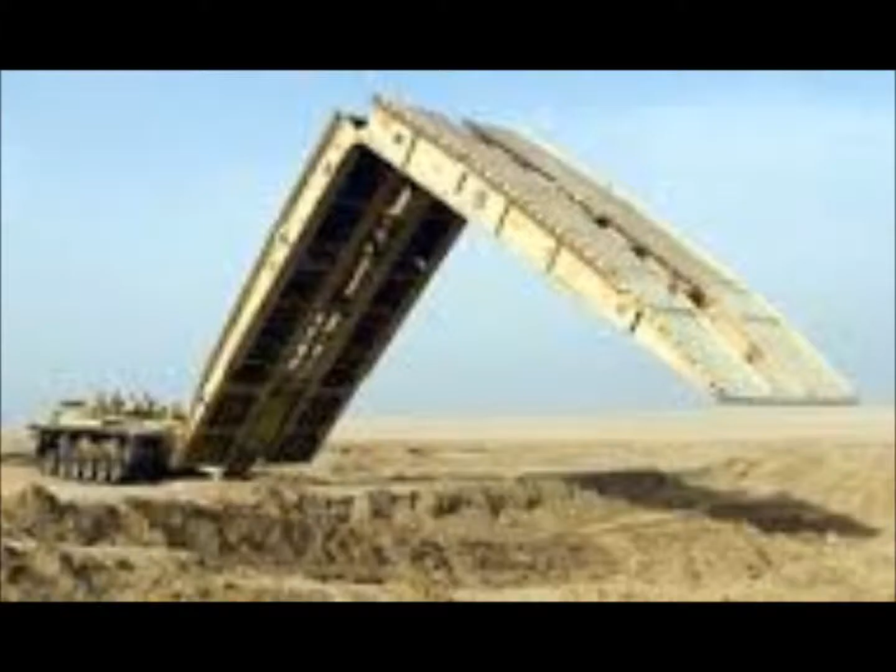Design of an electromagnet scissor truss deployment bridge. First designed during World War II, deployable bridges were invented to cross areas with inadequate infrastructure. Deployable bridges today are used in a variety of military and relief operations. Deployable bridges are lightweight bridges that are easily set up and taken down.

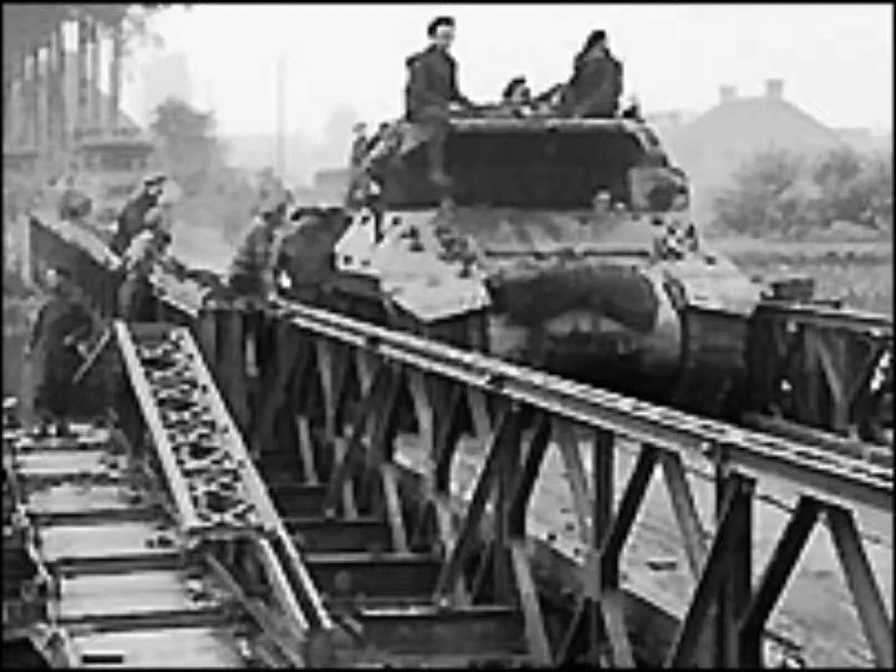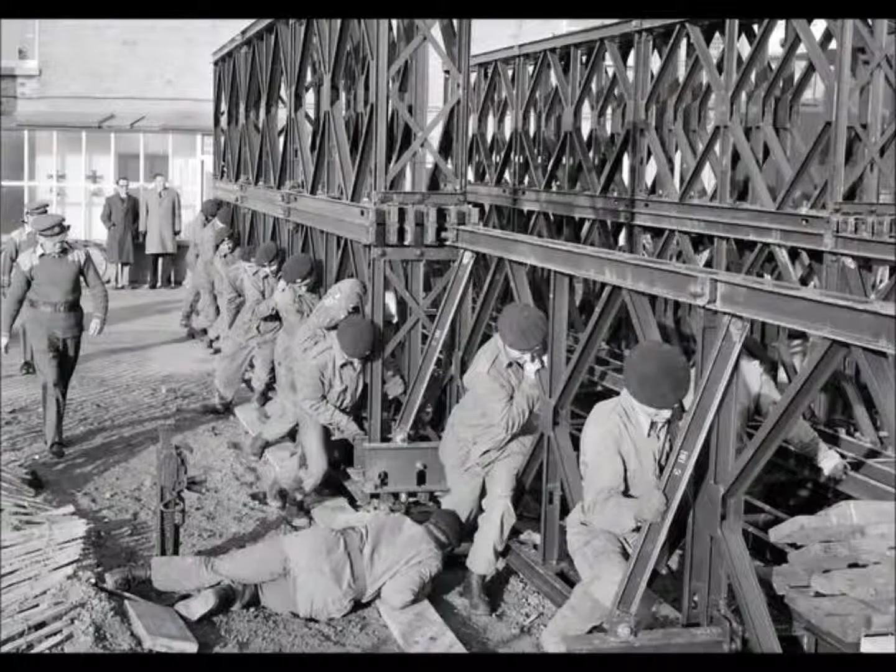The bridges are mostly used after natural disasters where transportation of supplies is urgently needed. But after such disasters, roads and bridges are closed or flooded, making it very hard to transport vehicles across. Different structural designs should be used to cross different spans because there are different stress dispersions.

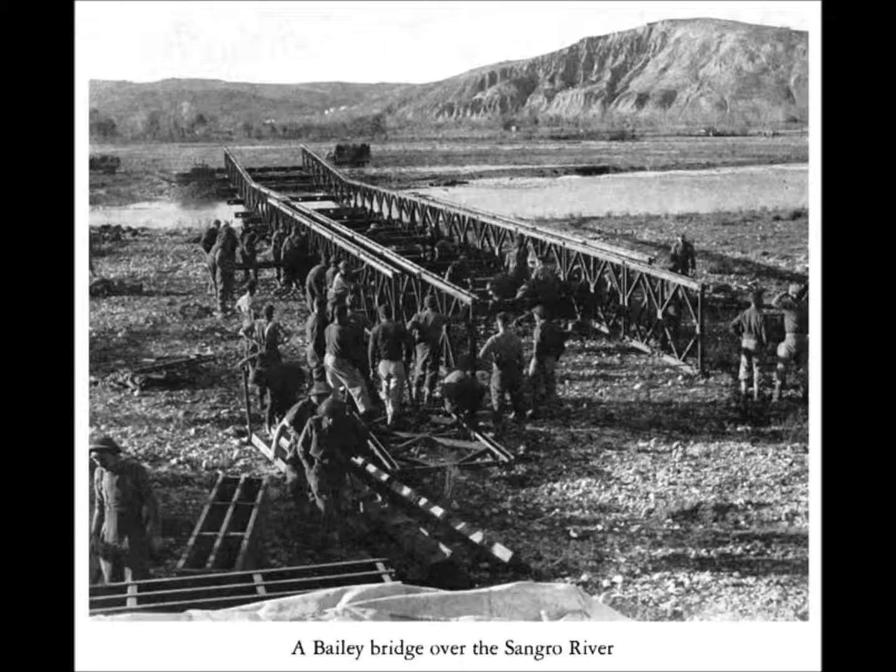There are 5 main points that engineers designing the bridge have to remember in order to make a good deployable bridge. First, since the bridge has to be deployable without advanced knowledge of the span of the ditch or stream, it has to be able to be multiple lengths. Second, the construction material has to be readily available. Third, the bridge design has to be basic and repeatable, so that only that one piece has to be manufactured

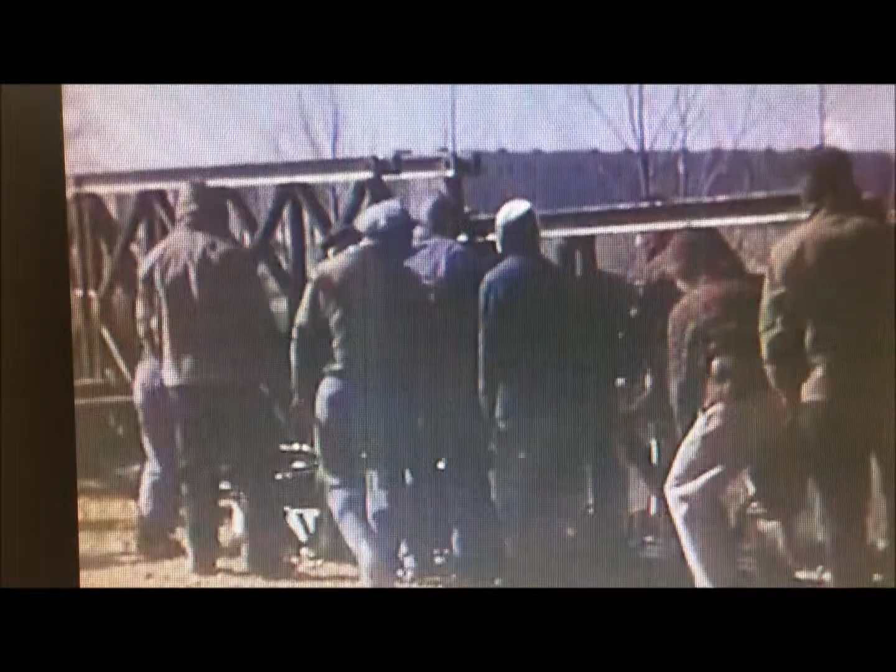over and over again. Fourth, it has to be deployable, which means that it has to be lightweight for a few people to be able to carry it. And the fifth guideline is that the bridge has to be easily put up and taken down, so a simple design is needed.

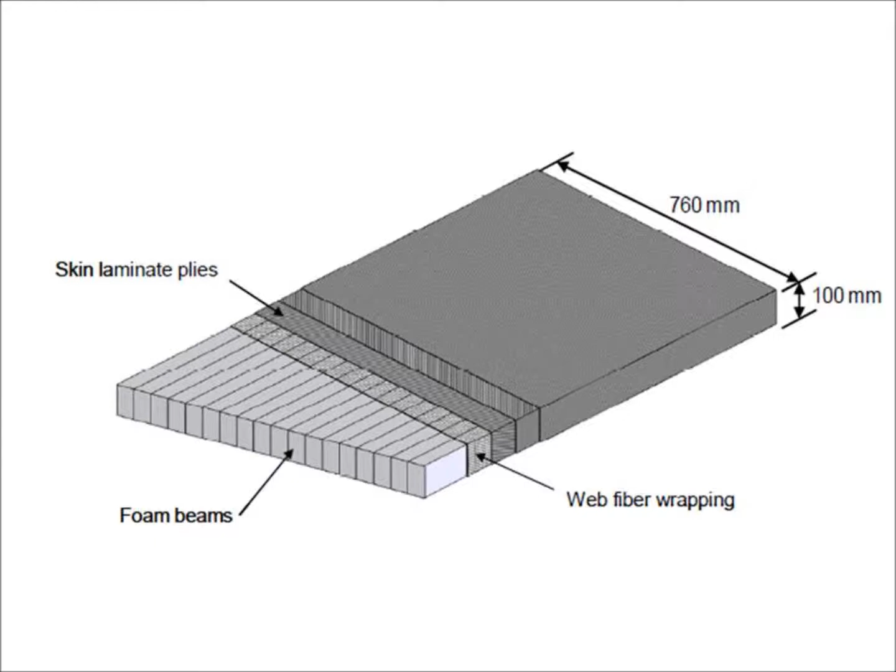Kosmatka used a classic beam bridge design, laying down 2 750-pound planks made of a foam core with a carbon epoxy skin next to each other. 2 planks had to be moved in Kosmatka's experiment.

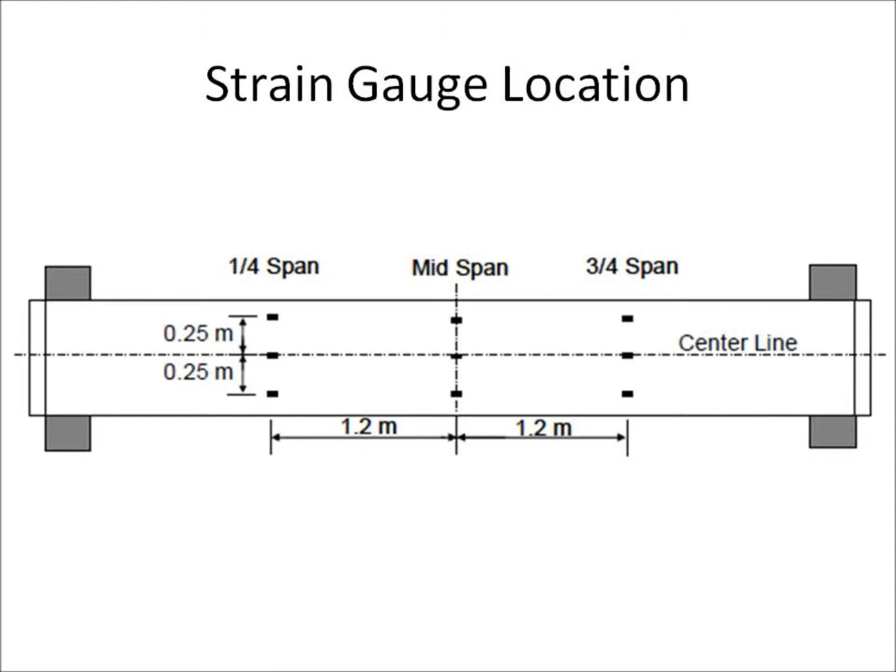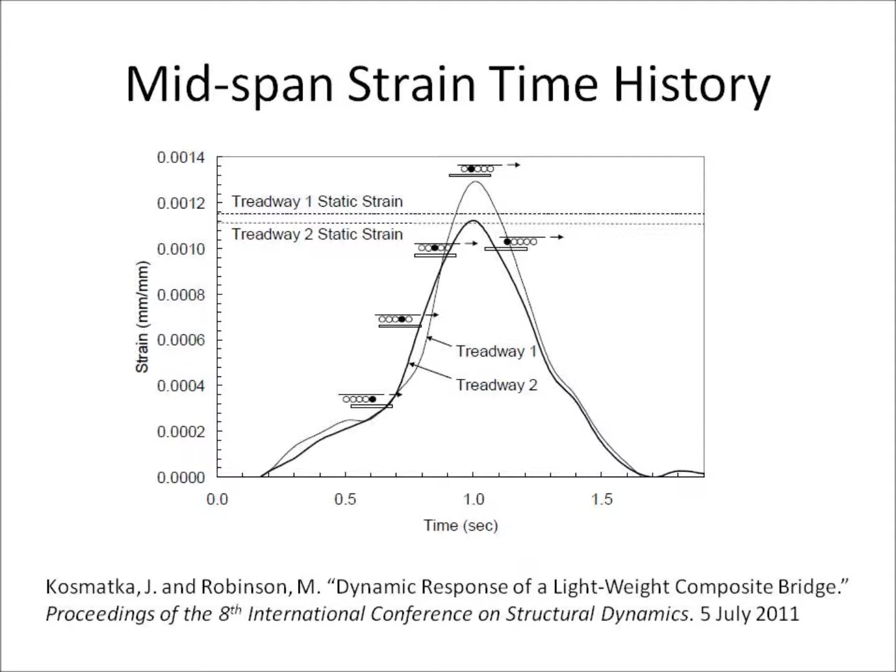Agusril and Abdullah both used the same design for their deployable bridges. It was a beam bridge that from the side was a solid trapezoid. It started at the ground, ramped up, was flat, then ramped down again. Where the slope angles changed, there were hinges so that the bridge could be folded into thirds. This allowed it to be transported in the back of a truck. The bridge was also very light.

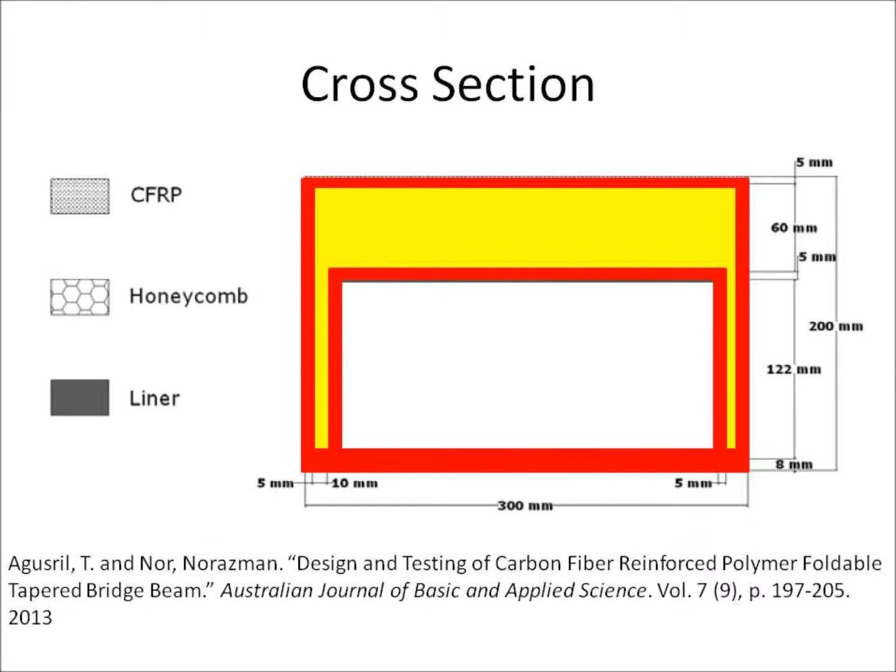This is what it looked like from the cross-section. The outside, highlighted in red, was made of carbon fiber to support the top, highlighted in yellow, which was aluminum. This beam bridge system works for short spans only because if there was too much weight added, the vertical deflection becomes too great and causes the bridge to fail.

As you can see in the graph, where the y-axis, which is the independent variable in this case, is the load, and the x-axis is the displacement in millimeters, already the 6-meter bridge Agusril designed was not even able to withstand more than 11.3 kilonewtons, which is equivalent to 1.15 tons. A longer span would not be viable. A deployable bridge should be able to hold a minimum of 30 tons.

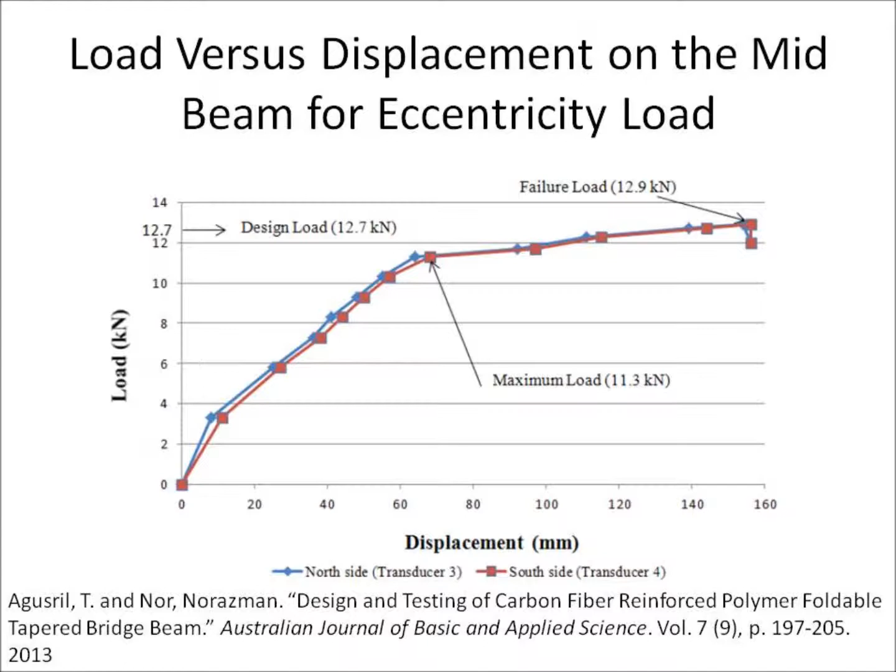The yield limit for this bridge is 11.3 kilonewtons, because after that point the displacement changes drastically for every small increment of weight added. The article's other graph, deflection of the middle beam as the load is moved across the bridge, shows that the deflection in the center of the bridge is almost the height of the bridge itself. This is why beam bridges are not a good choice for longer spans, because they do not have reinforcements to keep them from bending under the load.

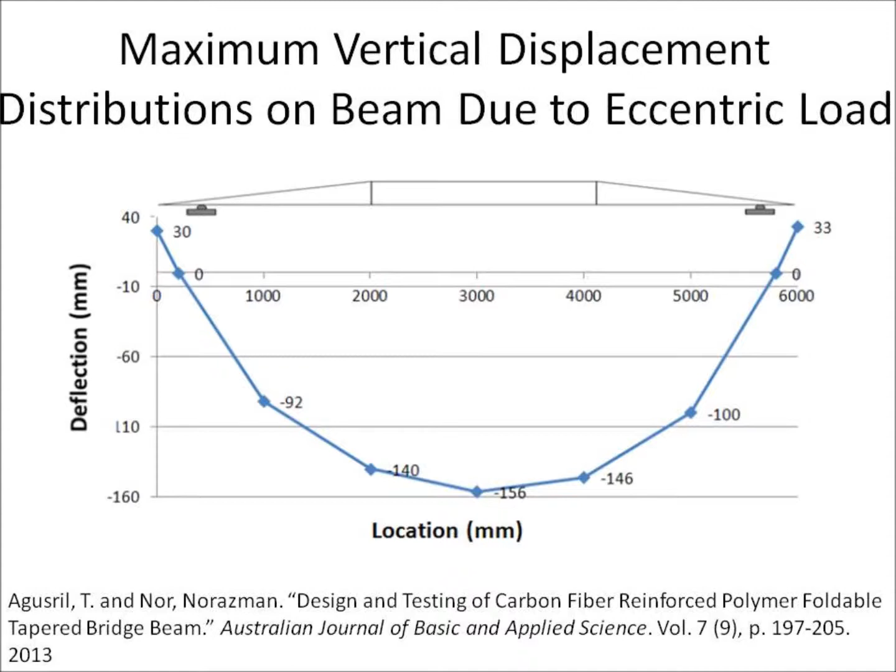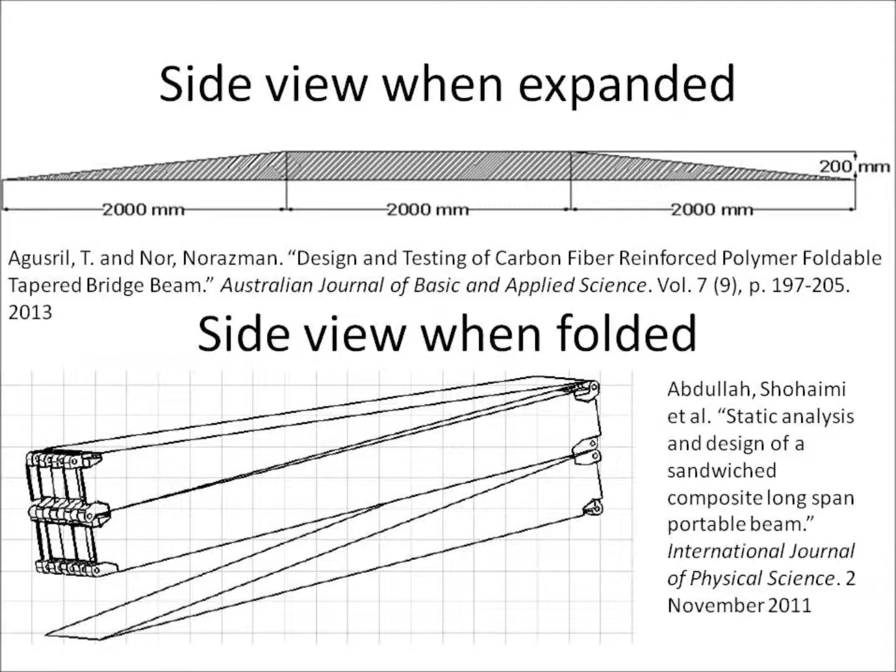All 3 journal articles used bridges that were short compared to the maximum possible span needed. Beam bridges do not work well for longer spans. Usually taking the form of a trapezoid, the truss bridge is commonly known for its triangles and/or X's. It has a top and bottom span which are connected by perpendicular king posts. The king posts are then connected by diagonals, truss members, which give it its distinct look and make it sturdier to withstand heavy loads.

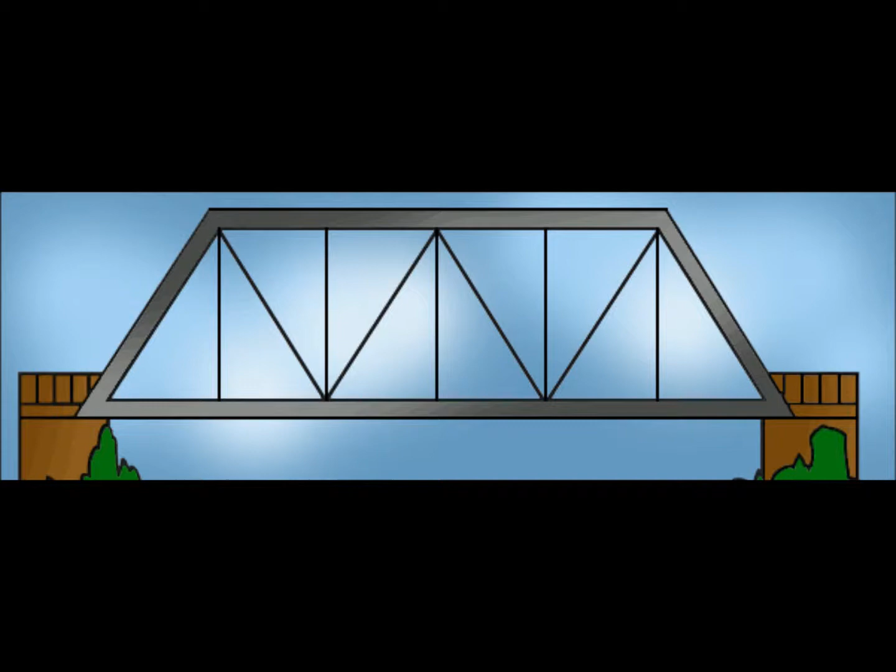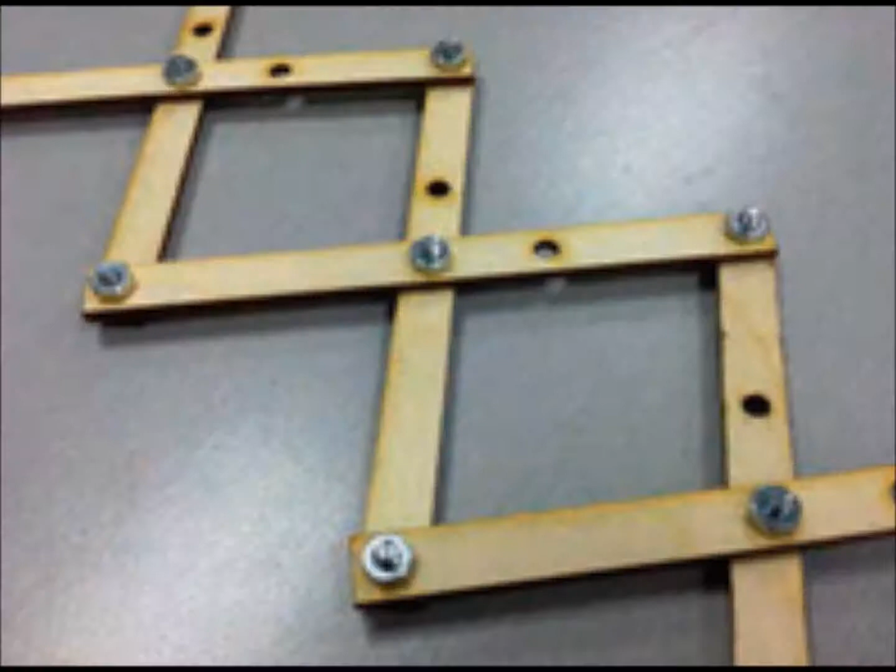Another design, as suggested by Juan, is a truss bridge with a scissor deployment. The design of Juan's bridge is very simple and is seen in other devices that use a pivot point. His concept was a scissor extension. The centers of the X's in the truss frame are on pivot points and shift to lay on top of one another when pressure is added from both ends. This causes each X to fold into one line, and the entire bridge is easily movable.

Juan's bridge was strictly pedestrian and therefore did not have to carry as much weight and be as stiff as a vehicular bridge would have to be. This bridge also met all the deployable bridge criteria.

Because it was able to scissor out and expand to any length, the scissor mechanism could be repeated multiple times, making it easy to manufacture because it is two truss members with a pivot point. It was made of hollow steel, which isn't that lightweight, but is available and is lighter than regular steel.

The scissoring out is what makes it so easily deployable, and was the entire point of designing a bridge that way. Juan's bridge is deployed by having two scissor truss infrastructures. One infrastructure is used to be the top of a pulley to allow the actual bridge to slowly be dropped across the void.

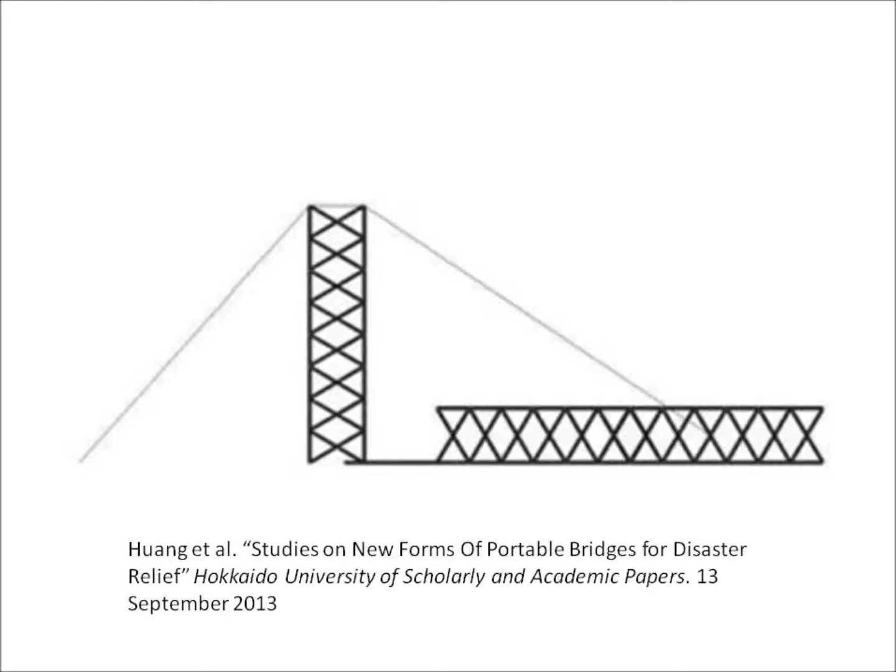The purpose of this experiment is to come up with a new idea for a deployable bridge which is lightweight and durable.

Before the proposed design can be explained, a general overview of where stress is on a truss bridge must be explained. The king posts are under compression and the truss members, the X's, are under tension. The top span is being compressed because of the vertical deflection as the load moves across, and the bottom span is under tension.

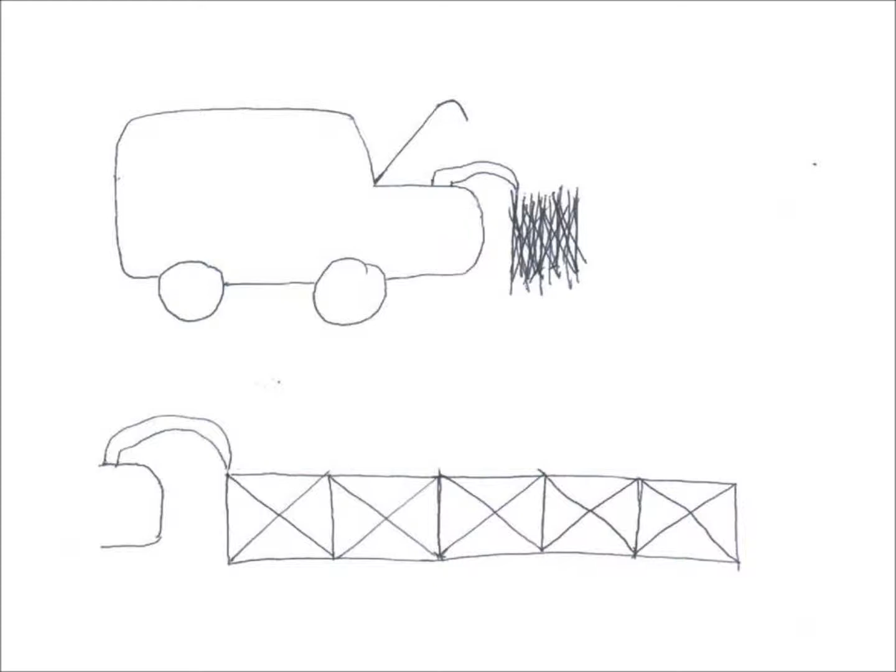The design proposed in this video is very unique. It will use electromagnets powered by the truck to expand the scissor truss bridge. The magnetic field is created when electrons spiral. By having one piece in the bridge spiraling one way and the opposite side spiraling the other way, two different magnetic poles are created, causing them to be attracted to one another.

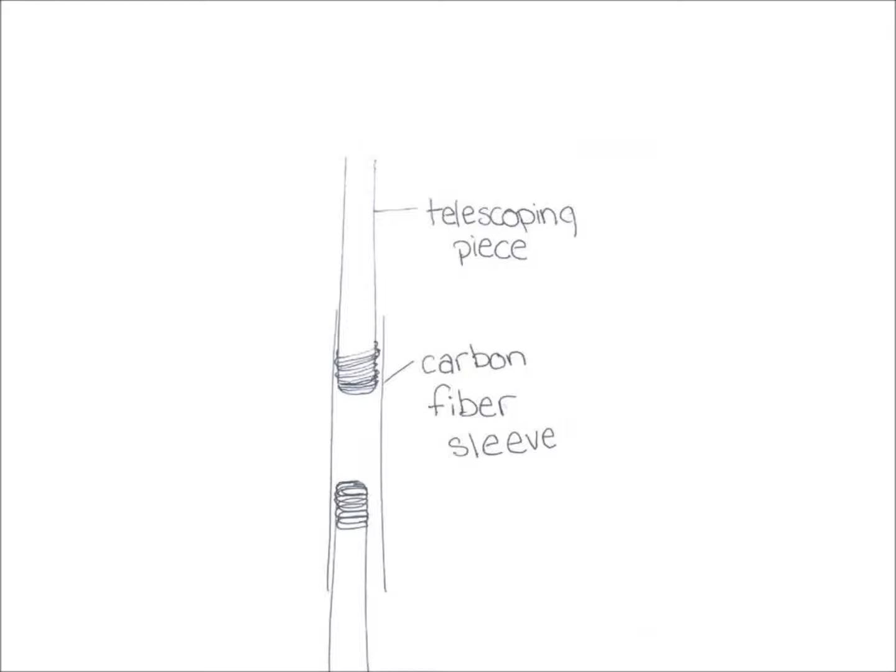The king post will be a sleeve made of carbon fiber so that it is lightweight but still durable. Two steel cylinders are able to telescope inside the sleeve. Those telescoping steel pieces would have wires coiled around them to create the electromagnet. The electromagnet would get its electricity from the car the same way a car is jump-started.

When the magnet is turned on, the steel pieces are attracted to one another, causing them to come together inside the sleeve and shorten the king post, causing the truss pieces to scissor out. The only possible problem is that when the current is quickly released to the coils, the electromagnets may snap together too strongly and may rip the bridge by not giving it enough time to pivot.

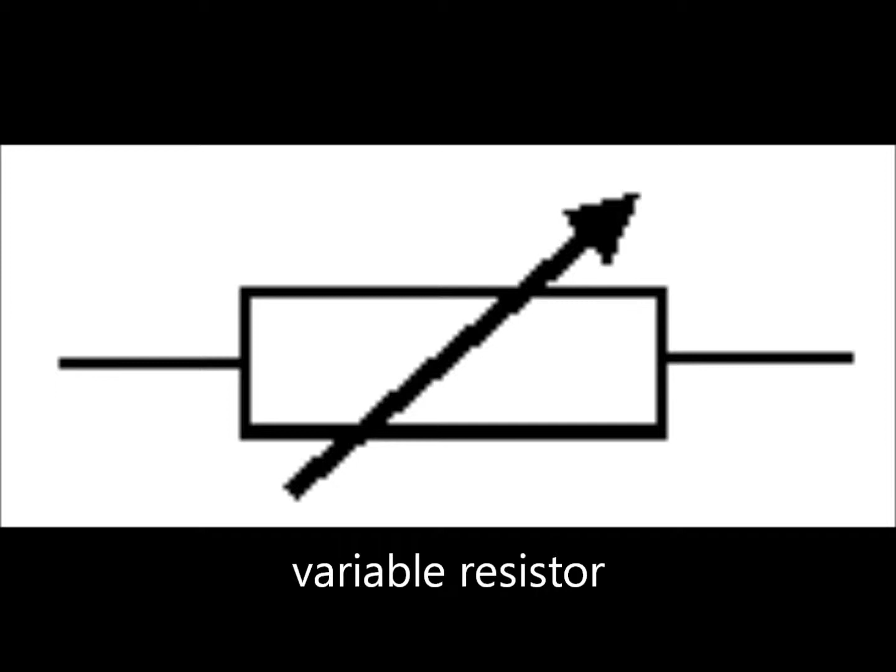Therefore, like a dimmer switch in your house, a resistor will be in place to restrict the current. Once the bridge is deployed, the electromagnets can be disconnected because the king post will be under compression anyway and would not need that reinforcement.

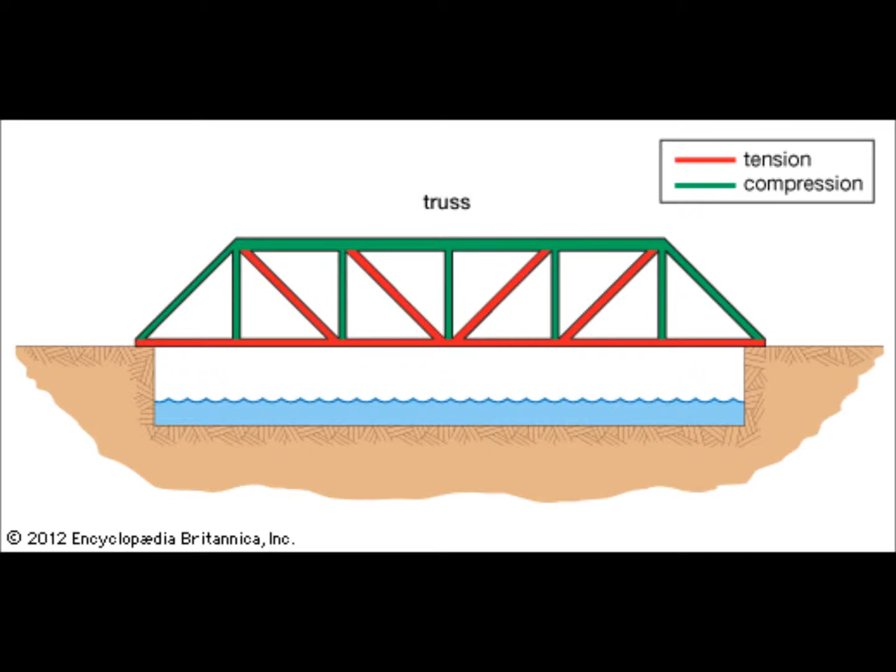However, hypothetically, the best thing to use would be carbon fiber because it would create the lightest but most durable bridge. However, carbon fiber is very expensive, so instead I'm going to use PVC pipes, which are plastic pipes, which are also lighter than metals, and are also very durable.

After the bridge is designed and built, two tests will be done. One, timing the speed it takes to deploy, and a second, measuring the strain. The test that measures the time will have two variables: one where there is no variable resistor, and the second is using the variable resistor to deploy the bridge. Then a one-way ANOVA post-hoc Scheffé test with p-value less than 0.05 will be done, and it will be graphed with its averages plus or minus standard deviation.

Strain gauges will be used to measure the stress exhibited when the electromagnets are on, while they're on but have little power, and when they're off. Each of these groups will also have different weight loads: 50 kilograms, 100 kilograms, and 200 kilograms.

50 kilograms represents a person walking across the bridge because an average person is about 50 kilograms. 100 kilograms would be a person with a backpack, and 200 kilograms is equivalent to either 2 people with backpacks or 4 people. Then, after the measurements are taken, a one-way ANOVA post-hoc Scheffé test with a p-value less than 0.05 will be done, and the averages will be graphed plus or minus standard deviation.

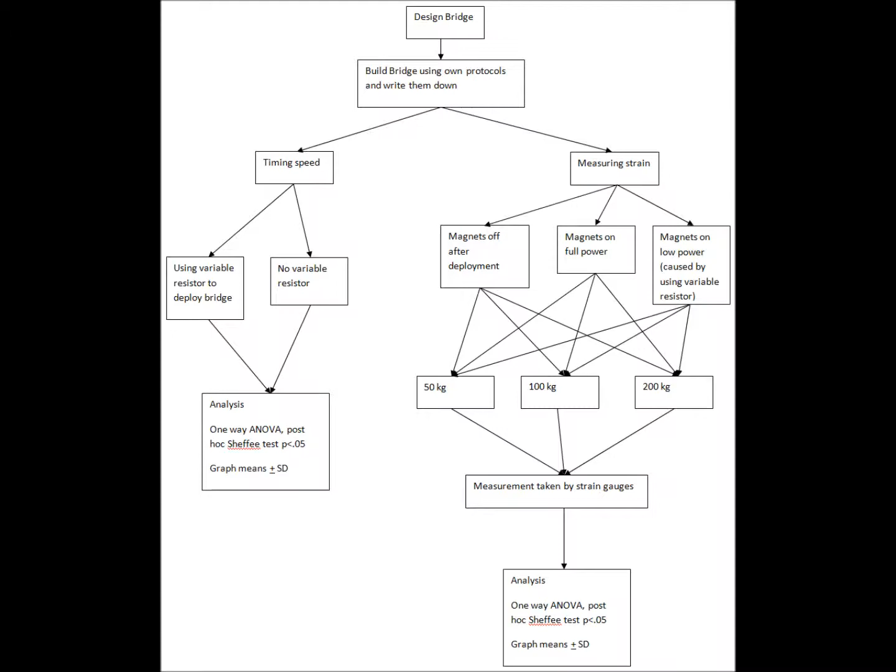For this project, I will need to buy the PVC pipe, steel rod, copper wire, jumper cables, wire splicer, a variable resistor, strain gauges, and sandbags. The PVC pipe is the outside of the king post and the truss members, with a steel rod telescoping in and out of it as the core of the electromagnet. And the copper wire is used to wrap around the steel rod to be the electromagnet.

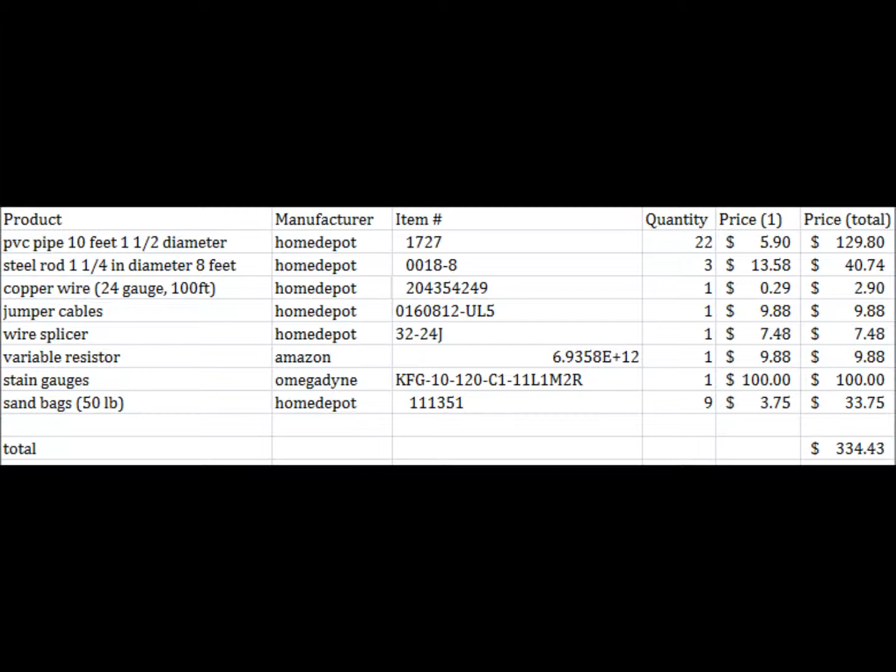Jumper cables are used to transfer the electricity from a car to the electromagnet, along with the wire splicer and the variable resistor. For the measurements that need to be taken, the strain gauges will be attached to the bridge, and the sandbags will be placed on top of the bridge to create the weight, the load to make the stress and for it to be measured. Thank you for watching this video.